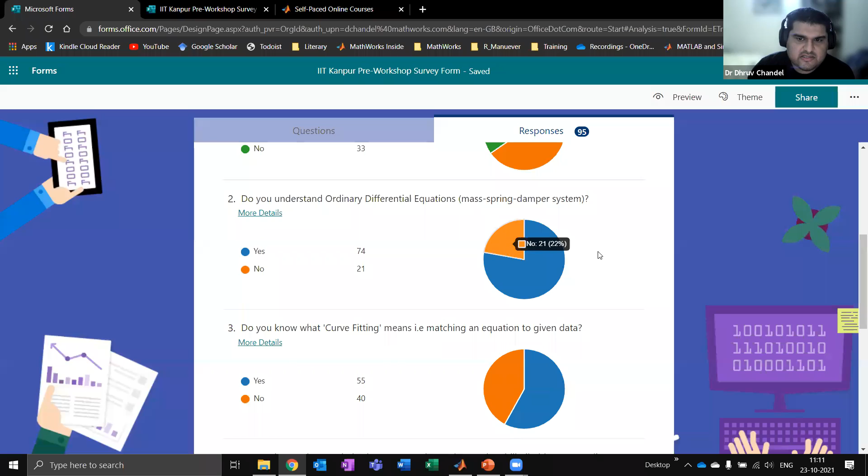Do you understand ordinary differential equations, which is like a mass spring damper system for today? So most people understand it. I will briefly explain it for the people who don't know about it, and I will share some training links where you can go afterward to read on it if you can't follow.

Okay. Do you know what curve fitting means? Little more than half. Okay, so we'll explain curve fitting in detail. Very few people know what optimization means. Okay, so what I'll do is I'll try to spend some time here if possible, because as an engineer, if you want to work in any subject these days, even if it is like a data science subject, optimization is at the core of it.

Okay. Many of you have heard of these terms: machine learning, deep learning, data science, AI. It all relies on the same techniques that we are going to look at today. So you have to understand optimization, and we'll discuss a little bit of it.

Okay, just looking at the comments. Can we also analyze AC signals using this? Yes, but we're not covering that today. Please give us small assignments in between the session. Yes, so you will have all the files, you can run the files yourself. And everything is hands-on. This is not a lecture. You will have the files and you will run it yourself. Okay, please describe the ODE part. Yes, I'll do that.

Okay, what do you want to see the most? Everyone wants to see optimization and machine learning and Simulink. Okay, so I'll decide if I'll show Simulink first. I might skip the apps part depending on your feedback. Okay, let's see how much progress we make. Okay, cool. So I assume that's okay. Right. So let me close this. Just give me 2 minutes and then we'll go straight to the hands-on part.

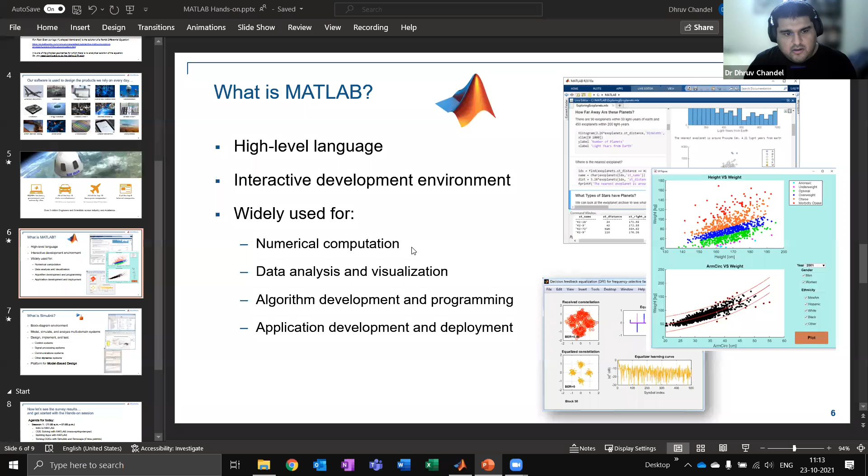So most of you said you already know the basics, but what is MATLAB? It's a high-level language. So it is something that is designed to be easy for humans to code in. So if you think about languages like C++ or Java, they're basically low-level languages. You have to compile them and then they will run. They're closer to the machine code level. MATLAB is something at a higher level. And the code which you write is very easy to learn. It's very easy to write.

The trade-off is that the speed is a little bit slower. But if you're an advanced user, you can actually convert MATLAB code to C++ code. And then you can have both the ease of use and the speed. The place where MATLAB is used is for development. So if you want to work with mathematics, if you want to work with graphics, you want to make plots of things, you want to filter signals, you want to solve equations, MATLAB can help you out a lot.

Okay. So numerical computation, data visualization, developing algorithms, and then developing applications, all of this can be done in this language. I'm not going to say that it is the best at everything, but if you take all the tasks in aggregate, there are very few environments, in my opinion, which can do all of these pieces, even if they're not so great at specializing in one or the other. So that's why it's quite useful.

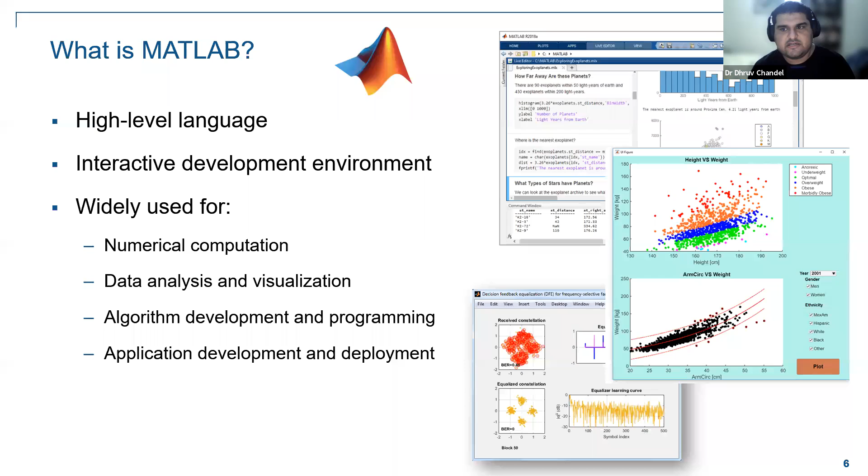The second tool we make is called Simulink. I'll show this briefly. So this is a different kind of tool. It's a block diagram environment. You basically don't write code. You connect blocks which represent mathematical functions. And you can model super complex systems. You can model an entire car, for example. You can model the engine, the drivetrain, the clutch, the brakes, the road surface, the driver, everything in one model.

And then that model you can use to simulate and test various kinds of things like control systems or communication systems, etc. So we'll try to show you a little bit after the initial thing. Okay. Just be aware that this exists and this is also made by us. So it comes at the same standard of documentation.

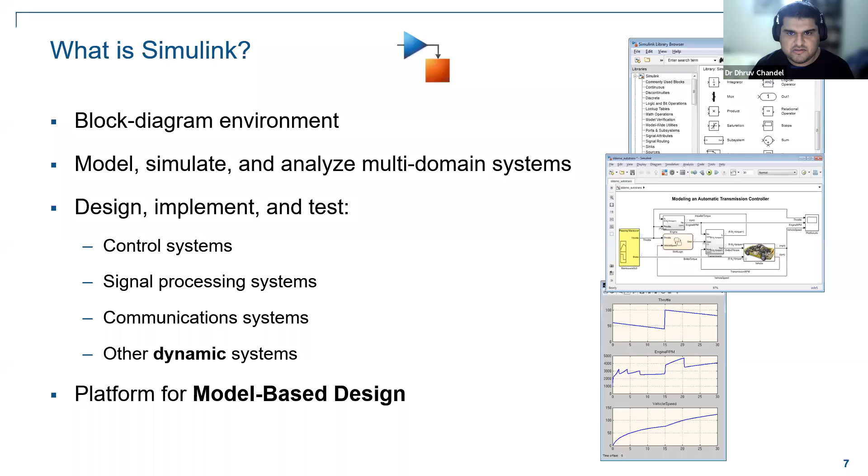What's the plan for today? So the first session, we'll just have a brief intro to MATLAB. Then we look at solving ODEs with MATLAB. So we'll start with the mass spring damper system. I'm hoping most people have knowledge of this. What I'll do is I'll go to Simulink first, and then the apps part we'll get to after that, because there was more interest in the Simulink side.

Then in the afternoon session, we'll have a 2-hour lunch break. Then in the afternoon, we look at curve fitting. Probably we'll look at optimization first and then go to machine learning, because they're quite related. All of these topics are very closely related to each other. Okay.

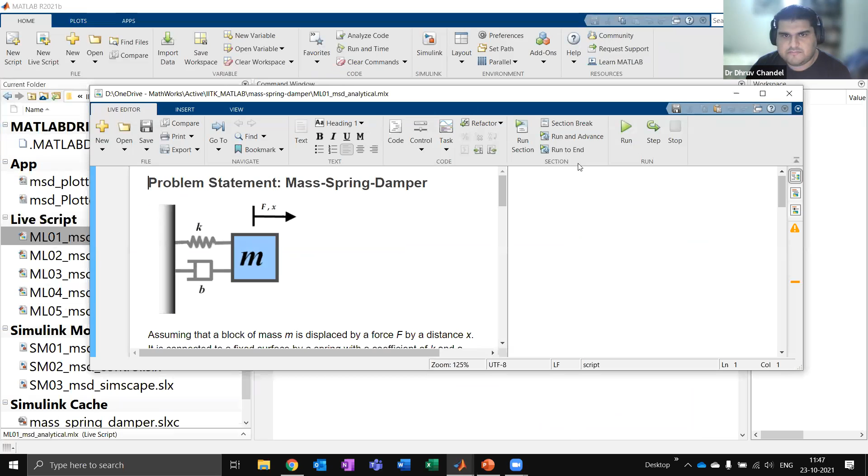Stop this. Okay. So when you open this live script, it's a .mlx file. So many of you will have worked with .m files. This is MLX, meaning it's a live script. And a live script will allow you to have text, images, equations, and code, everything in the same format. So this is kind of the modern way of using MATLAB. This is what we recommend these days. So we'll just show you how it works. The coding is exactly the same as before. It's just a few formatting things are given.

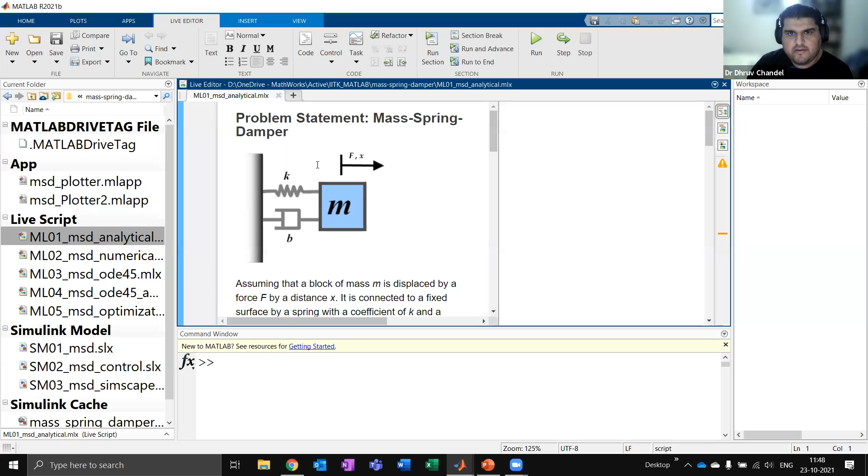So if this live script opens up for you properly, and it should, then just double click on this blue bar and it will maximize it. So it will take up your whole screen. Now, every time you plot something or you get an output, you don't have to switch screens. Everything will appear in the same screen. That is why this has been built.

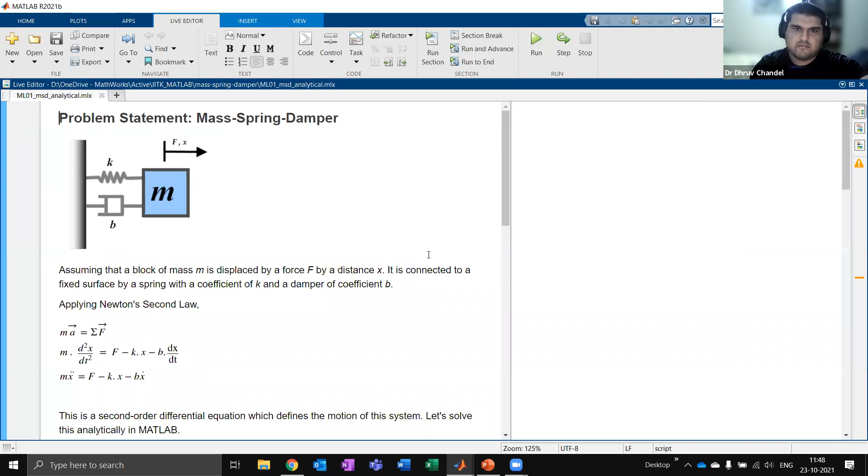Now, the problem statement for us right now is this mass spring damper system, how to solve for this. So what a mass spring damper system is, assume you have some surface and you have a mass a little bit away from the surface. It can be a block. Now it is connected to that surface by a spring of coefficient K and a damper of coefficient B. So a spring is something, if you displace it, it will try to pull back to the original position, right? That's what a spring is. I hope everyone understands it.

What a damper does is, if you move the block, it will resist the motion. It will resist the velocity. So a damper is basically like friction. The faster you move, the more energy you lose. And if you're just sitting at one place, it will not apply any force. Okay. So effectively speaking, this is like the suspension of your car. Because you have a mass, you have the surface of the road, in between you have your suspension.

So inside your suspension, you have a spring. Sometimes they have plates as well. And you also have a certain kind of oil type cylinder, such that your car will not keep on vibrating. The oil actually dampens out the vibration. It reduces the vibration. So this is a very, very practical problem. It is used everywhere. It's in your car suspension, in your motorbike suspension, in the landing gear of an airplane, inside robots. So the hinges of a robot are like this. Your muscles and bones behave like this in many circumstances. So it's a very, very common system.

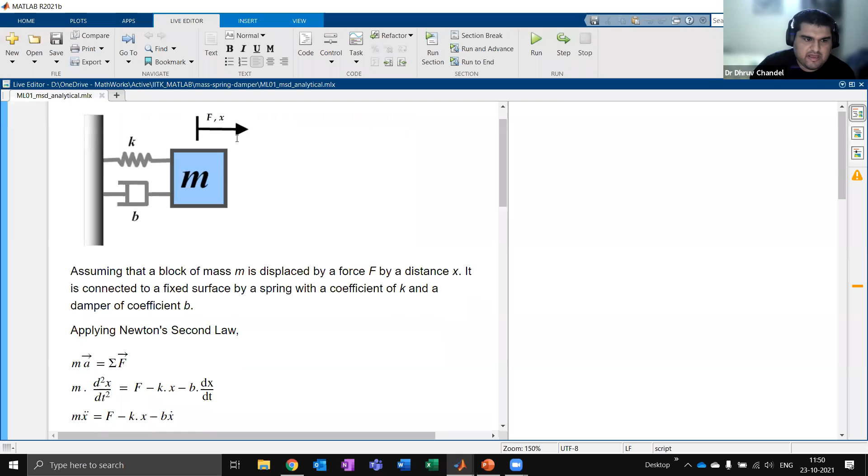And it's also typically the first one we try to take as an example. Okay. So we'll just fix everything on this one system today, and we'll see many examples of different ways of solving it. You can just as easily take a DC motor or some other circuit. That doesn't matter. The techniques are the same. Right. So what are the equations of this? So if I displace this mass by a distance of x, applying a force of F, I can use Newton's second law.

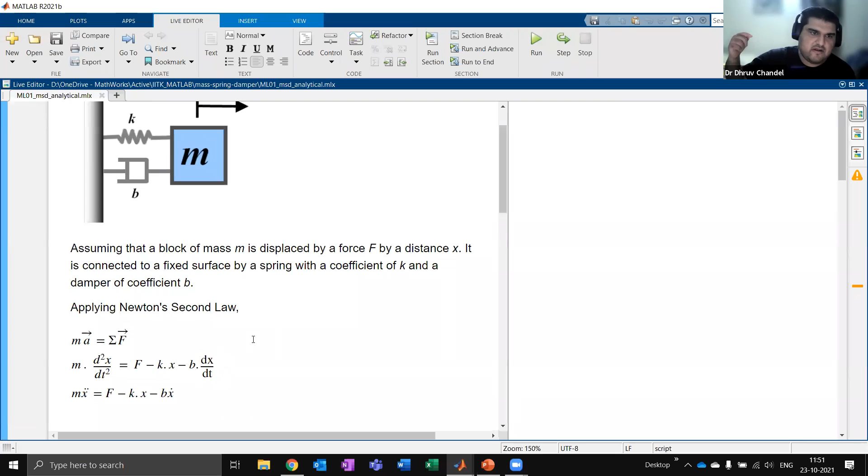So mass times acceleration equals the sum of all forces. And acceleration is nothing but d2x by dt squared, right? So I can say m times d2x by dt squared equals F, which is the force, minus kx, which is the spring force that is pulling it back, minus b dx over dt. So dx over dt is the velocity. The damping coefficient times the velocity will also apply a force against the motion, right?

And then we use this dot notation. So however many times you're differentiating it, you just put a dot on the top. So we say m x double dot equals F minus kx minus b x dot. That is the system of equations that we're trying to solve. So this is a second order differential equation because that's a second order term there. And what we typically do is we supply these parameters. We tell what is the mass, what is the damping ratio, what is the spring coefficient, how much force are you applying, what is the starting position. And once you supply all of those things, the computer will solve the equation and it will tell you how the system is behaving. Okay.

So for example, what I like to imagine is, imagine I have a car driving along and it goes over a speed breaker. So a speed breaker is kind of like a step input bump. So what will happen after that? Will my car just keep on vibrating up and down? Or will it settle down very quickly? Or will it be a very stiff response that all of the force of that speed breaker goes through your body? So we need to tune the parameters of this properly.

Okay, fine. So the way we operate in this live script is we typically use this run and advance command. So if you see these blue lines, which are between the different sections, the code is split up section by section. So you will run one section at a time. So you don't have to run the whole script if you change only a piece of it. Or you can click this blue bar on the left-hand side, and that will also execute the code. So you can either just scroll down and keep on clicking the blue bar, or you can just run and advance. Run and advance is usually easier. So I'll just click here. First, I'll clear the workspace and clear all of the outputs.

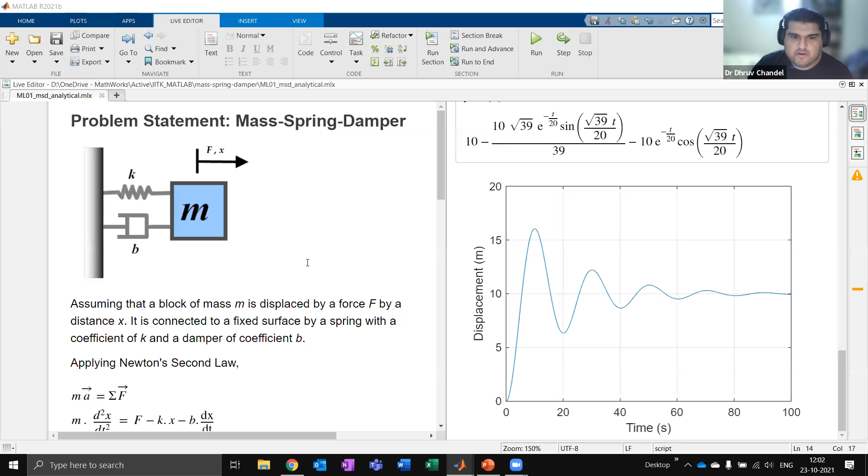Difference between single equal to and double equal to sign. Yes, that's a good one. So the single equal to sign is an assignment operator. It takes the whole equation and it assigns it to that variable. The double equal to sign actually is a way to test the equality. So it will say this part of this expression must be equal to this part of this expression. And this entire equation gets assigned into this variable ODE.

Okay. So similarly, we will say condition at x naught equal to 0. That's the equality that has to hold. And this entire equality statement, we assign it to a variable called condition 1. So that is the difference between the two of them. It's okay if you don't follow the syntax of this part. The purpose of this part is not the syntax. The purpose of this part is to understand the problem. We'll do it using different syntax in a minute.

So while I'm running this file, I am getting an error of adding symbolic toolbox. Syms requires symbolic toolbox. Okay, so I did ask people to install all the toolboxes. If you haven't installed all the toolboxes, you will run into errors in multiple places. So what you can do is go to add-ons, get add-ons, and try to get the Symbolic Math Toolbox from there. Otherwise, run on MATLAB Online because MATLAB Online has all of these already.

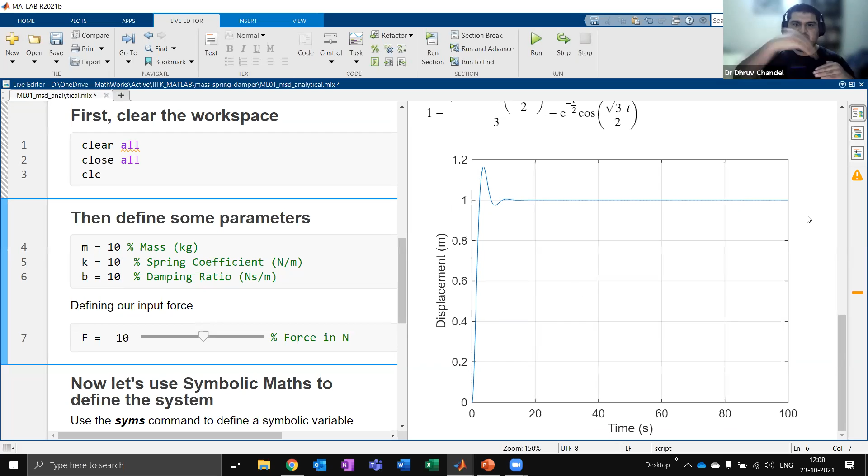Again, run to end. And what I see is actually a very nice output. So my car goes over a bump, and it just settles down after 10 seconds. This is a nicely engineered system. Okay.

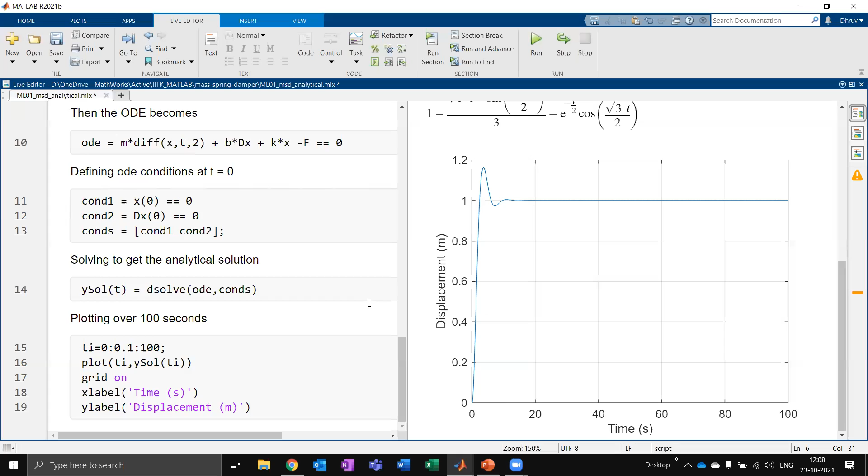Yes. In my system, the output is not changing. Okay, so you have to run all the way to the end, because all of the sections of the script have to run. Okay. Right. So,

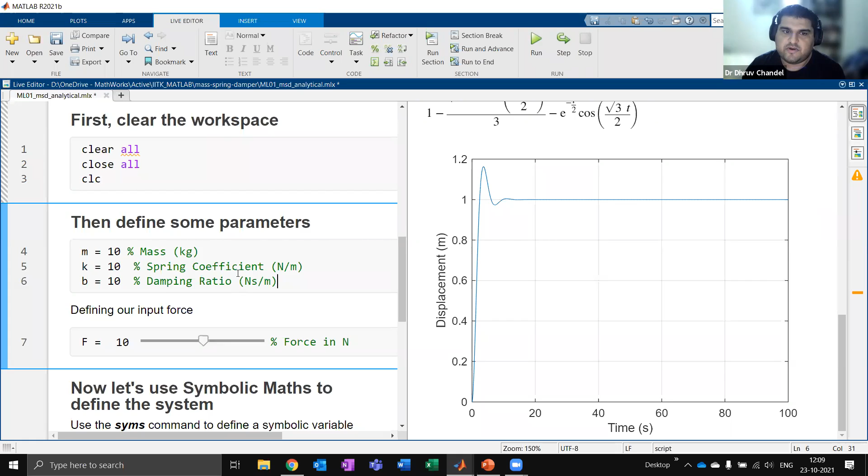first of all, does this make sense to people, what we are trying to do here by solving these problems in a computational manner? Just ignore the syntax of the symbolic math toolbox. That is not important. Do you understand what task we are trying to do here as engineers? Can anyone summarize or write in the comments? Not exactly optimization, close.

Maybe changing the input parameter and directly getting the output parameter, not solving the equation rigorously. Okay, I got half of that. Like changing the input parameter and getting the output parameter directly, and not solving the equation rigorously, like obtaining root 3 and all. It will be not easy. So by using trial and error method, you are calculating what would be the damping coefficient suitable for the system to be in stability.

Okay. So some nice answers here. So let me summarize all of that. So my job as an engineer, what is it? My job is to design some machine. That machine has to work sensibly, right? Now, in my theory classes, in my second year, third year of engineering school, they taught me the theory of all of these equations. So you will have learned, oh, this is a second order ODE. This is a first order ODE. This is the response that comes out of the second order ODE. And all of you, you are at IIT Kanpur, you are fully capable of solving this equation.

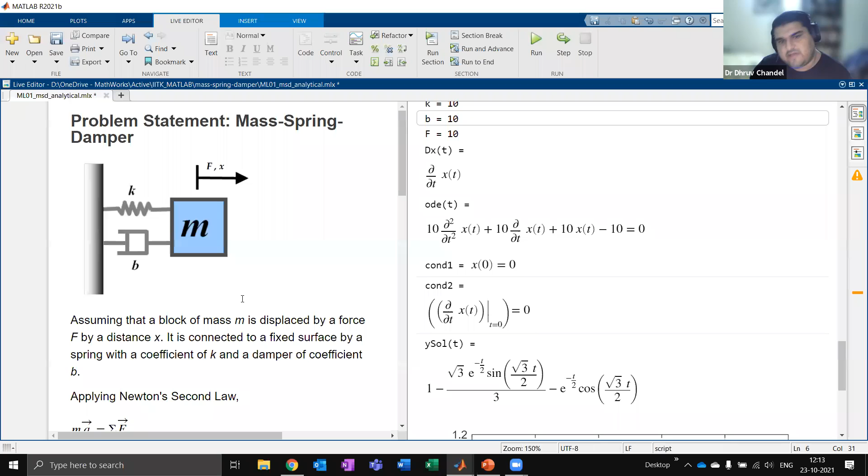And by using a computer, once I set up the solution, I can just keep on changing the parameters and see the output. I can select the right size of system that I want. This is exactly what you will do in your PhD research as well. You will have to show how you solved the problem. You won't have time to calculate all these by hand. So this is why we should know how to solve these equations. Okay. Cool. And we're also getting graphical interpretation for the various outputs. Yes, exactly. So I can see on a graph what is happening. Okay, cool.

Right. Any more questions or comments about the exercise as a whole at this time? Not about the specific syntax. No? Yes, okay. Okay, so I assume we are fine.

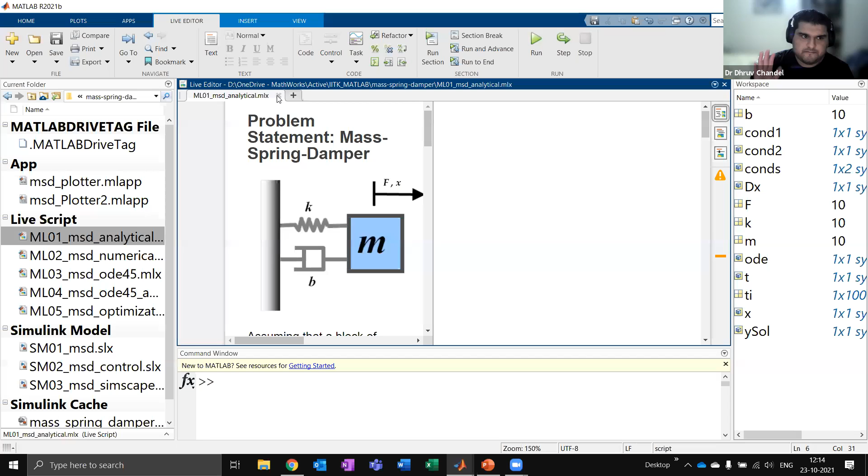Okay, so let me close the script. The second thing to understand is how are these ODEs solved? And how can I write my own solver in a way that I understand? Because the symbolic math stuff is too complicated, right? It's too abstract. So we'll open up this next script, ML02, the numerical solutions of a mass spring damper system. And then I will show how this solution actually comes.

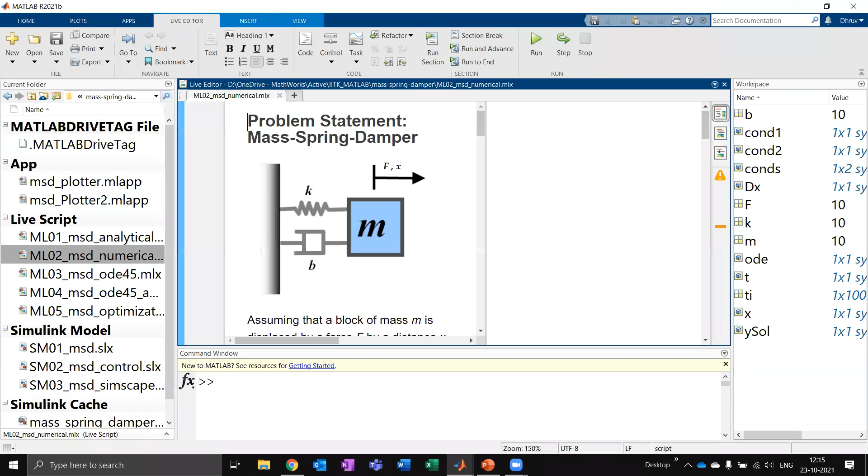Was that a question? Okay. Does everyone want a 5-minute break if you're getting distracted? Just type yes or no.

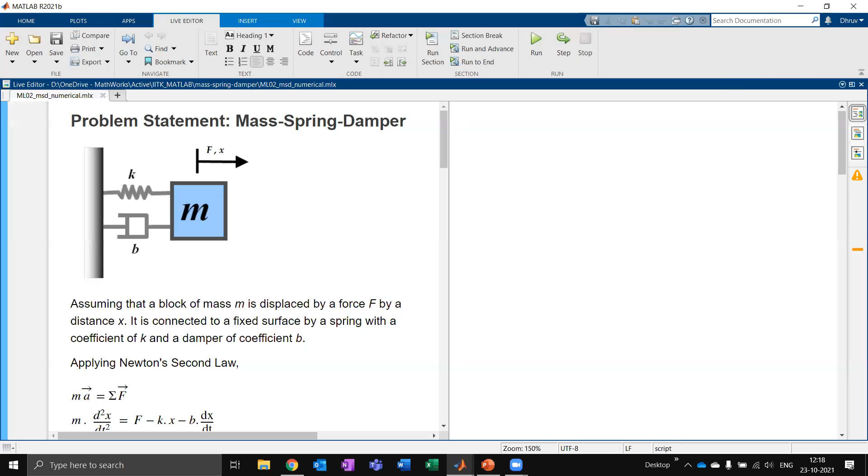Okay. So again, in the first two sections, it's the same thing. We clear the workspace, define the parameters, same parameters. But how do these numerical solutions of this ODE work? So suppose we have the same equation, m x double dot equals f minus k x minus b x dot. The only way you can solve the second order ODE, or the most convenient way, is to break it down into two first order ODEs. How do we do it? We break it down into acceleration-velocity conversion and then velocity-displacement conversion.

What does that mean? So if I know the acceleration of a system, how would I get to the velocity? Can anyone answer? By integrating it, right? If you know the acceleration of a system, all you have to do is integrate that value and that will tell you what the velocity is. So that is one ordinary differential equation. Now suppose I have the velocity of a system. How am I going to find out the displacement? Again, integrating it. If I know what the velocity is, I integrate it again, that gives me the displacement value.

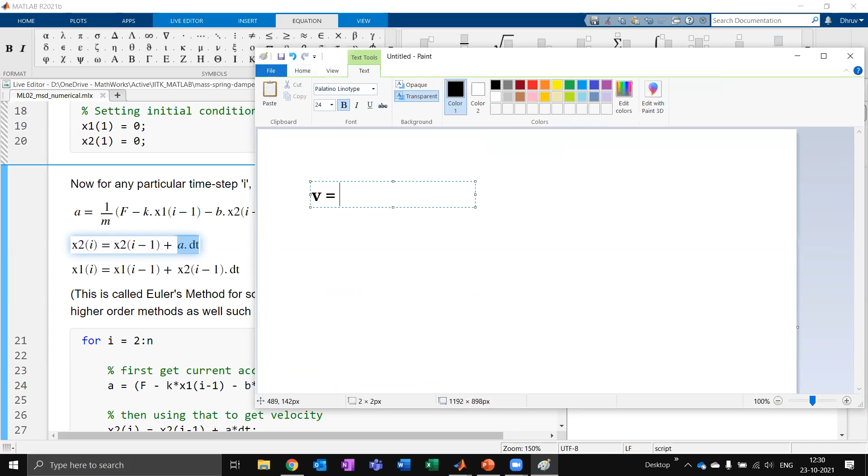Right. So what I have to do is I just open a for loop. So a times t means velocity, how? That is your 9th standard physics. Velocity equals acceleration times time. So sir, it should be integration of this with respect to t. This is integration with respect to t. Okay, let me explain it here. Do you understand this equation that you studied in your 9th class? Yes, sir.

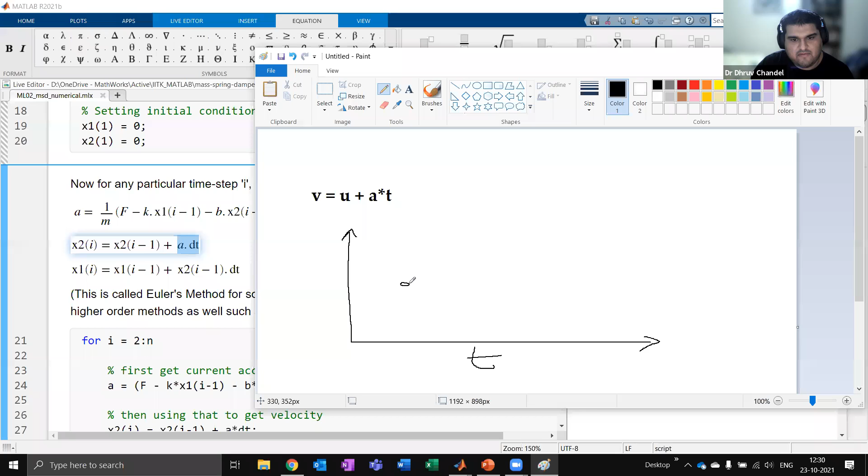So what does this mean? If I have a graph and this is time here, and I know my velocity at this point, so this is my velocity u. I know the rate of change of velocity. Rate of change is nothing but gradient, right? So that is a. And I take a time step of dt. So what is this point going to be? Can you tell me? u plus a dt. v.

Yeah. So this point is going to be v, which equals u, which is this level, plus a, which is the gradient, times dt. Sorry, that should not be a 3, that was a bracket. So this change here is basically a times dt, because the rate of change is acceleration and the time step is dt. Now this is how integration works. If you make your dt infinitesimally small, this is actually integration. Numerical methods always have a small error, but with a small time step it stays small.

Does that make sense, people? Okay, I guess some people have got it and some are a bit lost. I can have another try explaining. What is your doubt? Just tell me.

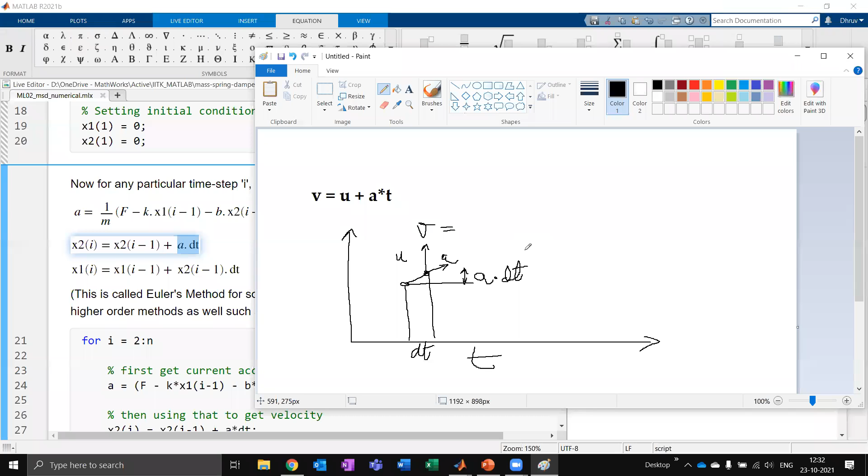You're muted if you're talking. I guess all of us understand this thing. Maybe the original student who was having the query can answer. Otherwise, like, all of us understand this. Okay. Yes, I got it. Okay, perfect.

Right. So from here, all I have to do is literally convert these 3 equations into MATLAB code, which is very, very easy because MATLAB is designed to do mathematics. So I just say for i running from 2 to n. So n was the length of my vector. I say acceleration equals f minus k x1 of i minus 1 minus b x2 of i minus 1. So x1 is displacement, x2 is velocity, and divide the whole thing by mass.

If I know my acceleration, I can say my current velocity equals last velocity plus a times dt, and current displacement equals last displacement plus velocity times dt. Now, if you are not happy with these indices, you want to do it all at the same time step, previous or current, that is fine. You can rewrite the code that way. It won't make much difference.

Anyway, when I run this code, oh, I didn't run the previous section. So just make sure you run this section. When I run this code, this system is solved. And all I have to do is plot it out to get the solution. So I plot with respect to time the values of x1 and x2. x1 is displacement and x2 is velocity. Okay, that's literally it. That's all it needs to solve an ODE.

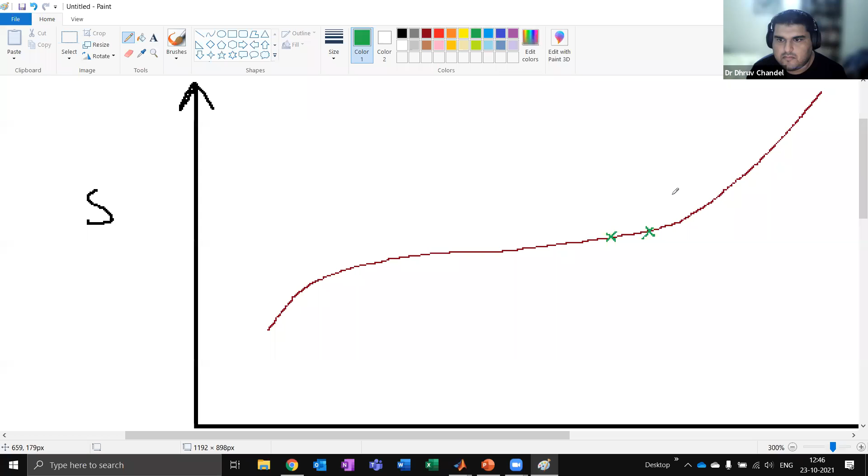So suppose that I select a point. Let me select it with this green color. Suppose I select a point, and after a time step of dt, I want to find the value at the next point. Can anybody tell me how I get from here to here? We just covered this. Multiplying the slope of the curve with the delta. Okay. Yeah. So I get the slope of the curve at this point. I integrate it with respect to time, over dt. So that's my dt. And I try to get the next value.

Now, because numerical methods are not exact methods, they're approximations. So if I use an Euler method, my value is going to end up somewhere like here. Okay, so I have an error. That is going to be my error. Now what that means is the only way to reduce this error is to reduce my time step. So for large systems, when we are doing a lot of computation and your system is changing rapidly, your time step becomes so small. It becomes 1e-6, so that you will have to do millions of computations per second of the system's behavior.

Okay. So to adapt to this, we came up with some more methods. There are two methods you should know about. One is called the Runge-Kutta method, and then I'll talk about ODE45. So just tell me yes or no in the chat. How many people know what a Runge-Kutta method is? Fourth order method. Yes or no? Okay, some people know it, some don't. That's all right. I'll just tell you.

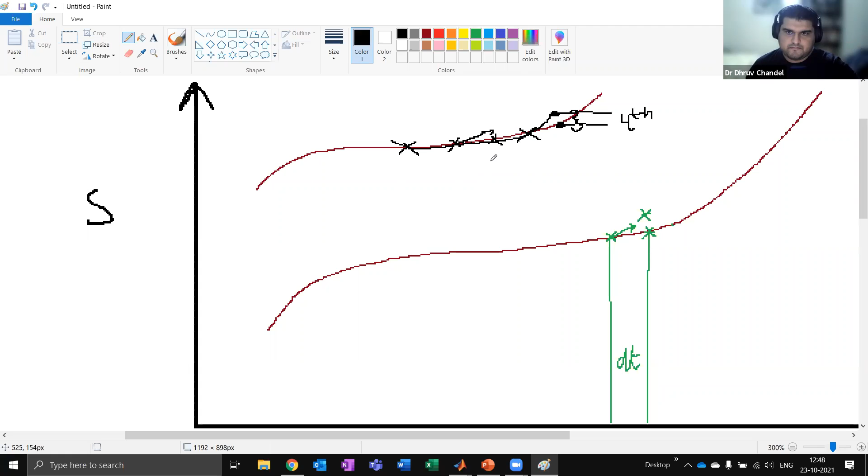Okay, so a fourth order method will typically have a smaller error than a first order method. And what that means is I can use a larger time step. So if I want to use ODE4, which is the Runge-Kutta method, I can use large time steps of dt, and I will still be able to get good solutions. That is why we use these fourth order ones.

But what happens after that? Again, you can come back and watch this video later on also if you're confused. After that is, even with fourth order, if a system is changing very fast, like here in this region, I need to have small time steps. Okay, so let me draw a few things. Oops, that's not working. So I need to have small time steps in this region, because the rate of change is still fast.

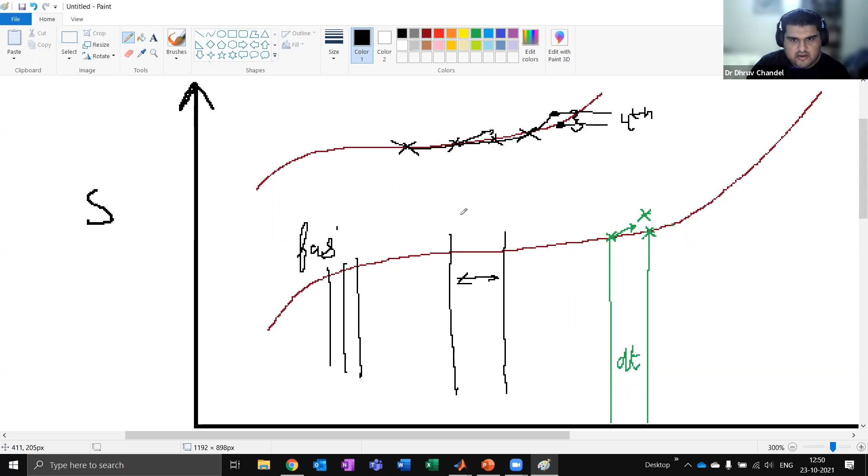But in this region here, I can get away with a large time step, right? Because there is hardly any change between these two regions. So here it is fast rate of change, and here it is kind of slow. I'm sorry about the pixelated stuff. I'm quite zoomed in here.

So what happens is we use combined methods where we have a fourth order and a fifth order method, and we compute both solutions at the same time, and we vary the time step dynamically depending on how fast the rate is or how much the error is. So when we say ODE45, that is not 45th order, that is actually 4-5 order. It's a 4th order solution and a 5th order solution.

Okay. So what happens is, where should I draw? Let me draw here. So if I'm sitting at this point, when I calculate the 4th order solution, it will be here. Make it a little bit cleaner at least. There. And if I calculate a 5th order solution, the value will come down here. And because of the way mathematics is, the 4th and the 5th order solutions, the odd and even solutions, will always be on opposite sides of what the actual solution is.

Can anyone tell me why? Can anyone guess? I'll tell you in a second. Sorry, could you repeat, please? It is because of the curve fitting, like x square versus x cube. One is coming positive, another is coming negative. Yeah. Pretty much. So roughly speaking, it all comes out of Taylor series or patterns of maths similar to Taylor series. I hope all of you have heard of this term Taylor series. You can go and look it up on Wikipedia afterwards if you have not.

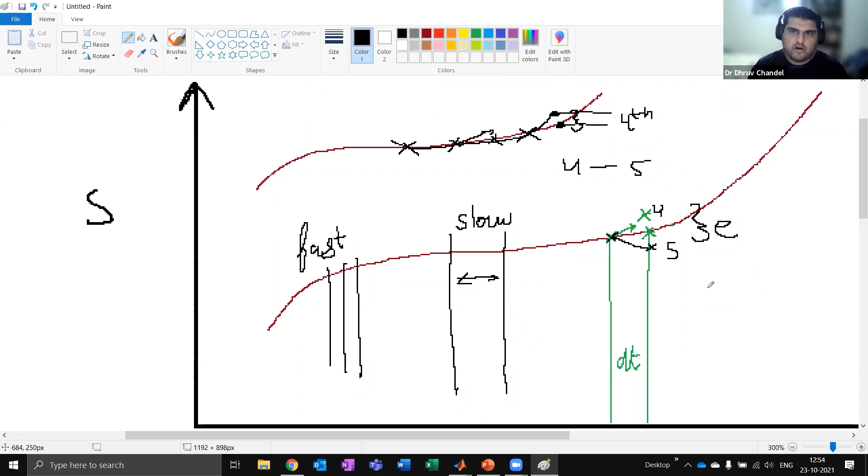How is the actual solution being chosen between 4th and 5th order? You can always choose the fifth order. Fifth order is always better, but the point is to compare the error between them. Okay, so just go and read up on that a little bit, and you will find lots of resources on this out there. All right.

Okay, so what I'm going to do now is, I hope you've been able to open up the Simulink model. I'll just show you how Simulink works in like 5 minutes. And if you want homework, your homework will be to go and do the Simulink on-ramp. So let me show you why Simulink is so powerful. So if I have a system of ODEs, actually, let me tell you what Simulink is.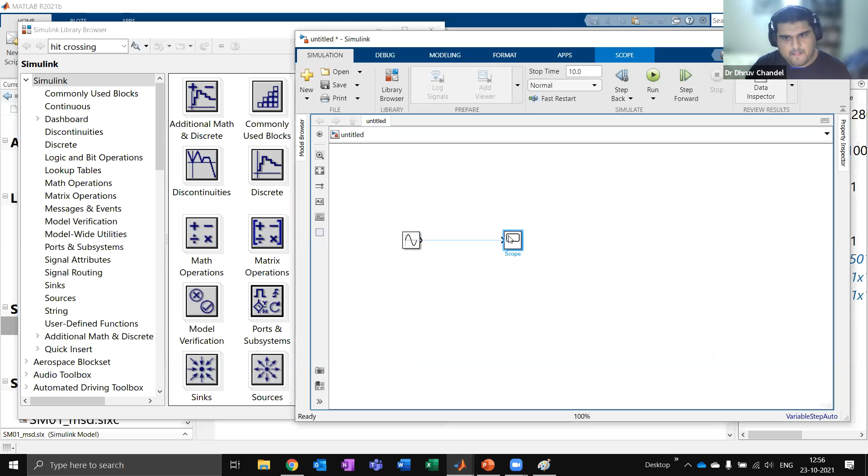So inside Simulink, what we do is we basically drag and drop different blocks into this canvas. And then we can solve the system very quickly without writing any code. So let's say I have a sine wave. This is one block. And then I have a scope. This is another block. And I kind of link them together. Okay, so I take the output from the sine wave block and I input it into the scope block. Scope is just a display block.

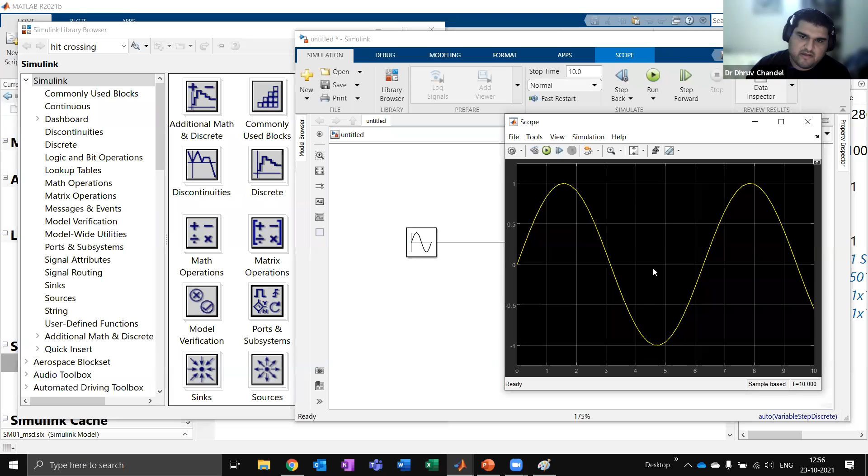And I run this. What I will see is what the output from this model is. It is directly plotted here inside the scope. Okay, so I don't have to write any code. I just pull in the mathematical functions, integrate, differentiate, whatever I want. I'll get the result directly.

And what is running in the back end of Simulink, if I go to modeling and then model settings here, is Simulink comes with a bunch of built-in solvers. Okay, so if I look at the solver details, you can see ODE45 is built in along with a bunch of other solvers. So there are solvers for stiff systems, for DAEs, etc. So ODE45 is the default solver in Simulink.

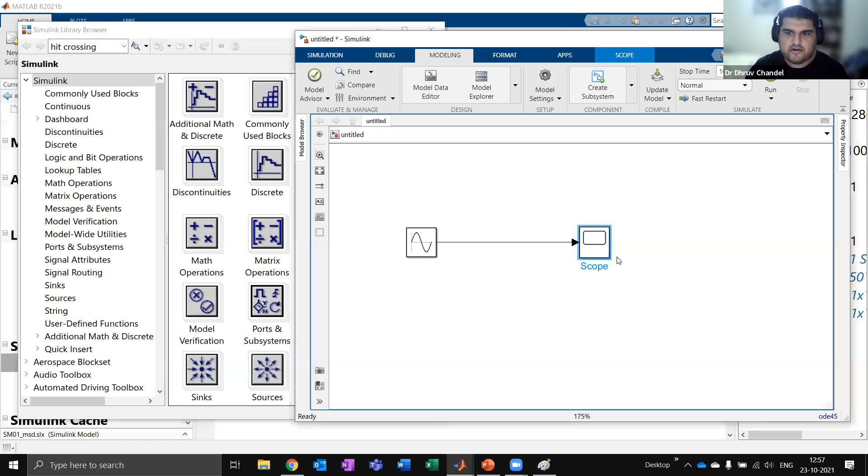And what this means is I can just define a differential equation directly here, and Simulink will solve it just by magic. You don't need to set up all the states and display this and display that. So suppose I had to solve this mass spring damper system. Let me show you how easily I can do that. Okay. First thing I'm going.